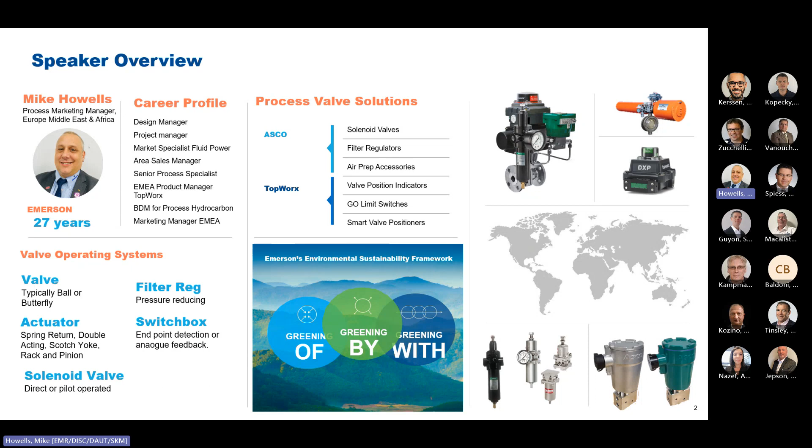So I'm Mike Howells, I'm the process marketing manager for Europe, Middle East and Africa. So predominantly I support the ASCO product range, but my previous positions were as TopWorx product specialist. So I have a good background on these topics and be able to give you an overview of what we can offer.

So just as a product overview, again, you may have seen this slide in the past, but the definition and context, it's a big word that's used very often these days, Industry 4.0. But what we're basically saying is that through the Industrial Revolution, we're at a stage now where we're looking at Industry 4.0 being a data or digitalization of processes and systems.

And how that works with ourselves is obviously the IIoT, which is the Industrial Internet of Things. And another phrase that we like to use within Emerson is floor to cloud. And what that basically means is that we're able to analyze some of our processes and some of our technology that we use in machine automation or process automation.

And from that, we're able to use diagnostics and statistical data, which can then be transferred into what's known as the cloud, which basically means it's in the internet space. And then we're able to access that information anywhere across the world, be able to act upon any of the diagnostic data that we receive or any of the information.

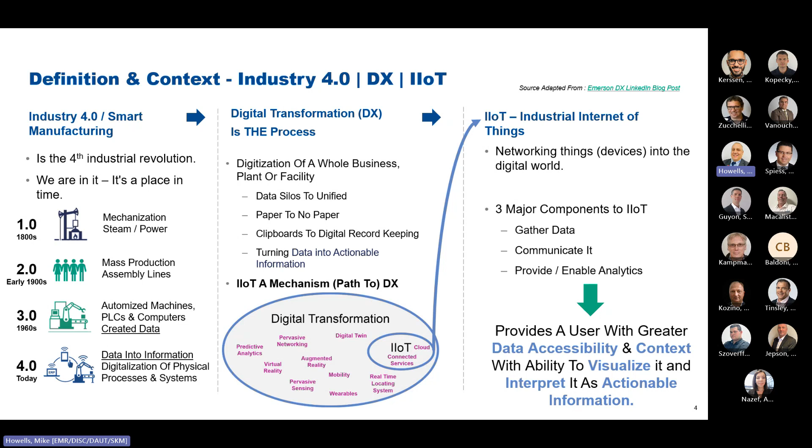So in a DX process, what we have is some DX ready process products. And within the process industry, what we have is a number of products which allow us to give digital feedback. So digital feedback is a sort of 0 to 1, or on-off system, of being able to give an electrical signal back.

And then from that information, we can interpret how long it takes to energize, or how long it takes to feed back, how many times it's fed back. And then we can use that information to diagnose how healthy our system is. So that's the simplest form of digital feedback, or DX, that we have.

And then what we have is some advanced diagnostics. So with some of our TopWorx product range, we have the ability to have a HART signal, which again gives us a lot more advanced diagnostics. And then we look at systems like the AF2, which is again able to analyze data in a greater format.

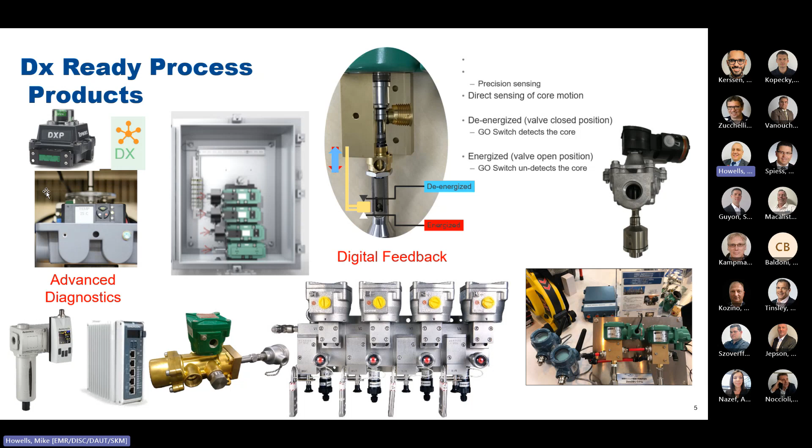And then we're using some of our RXi products to then interpret that data and be able to give us things like a graphical display, or using some of our software such as Movicon to be able to give that to a customer in a format that you can easily interpret.

So looking at some of the challenging solutions, again this big word, connected from device to control, from edge to cloud. So some of the areas where we've seen some benefits is that in energy consumption, around 20 to 30% is lost in compressed air.

Downtime - so when obviously you're not able to monitor a process, if you're not able to analyze the data, then we're looking at being able to reduce downtime in unplanned maintenance. And again, by using that statistical data, we can actually increase overall equipment effectiveness by around 5 to 10%.

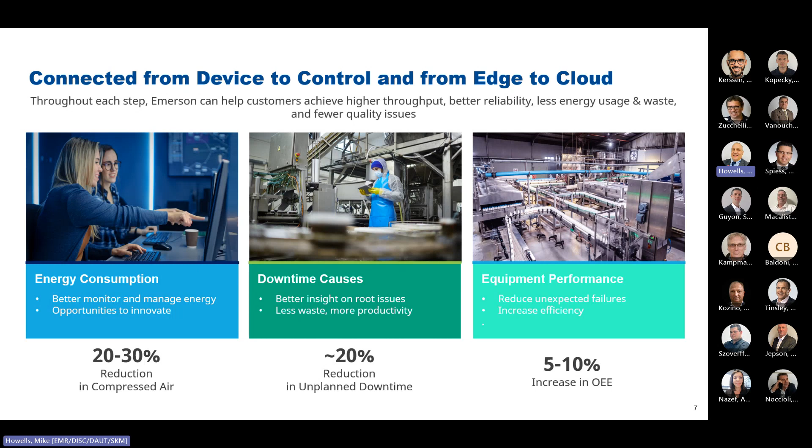So looking at some of the systems that we use, with preventing unplanned downtime, we can monitor the life cycle of key devices. So again, within the process industry, we have things like actuated devices, actuated valves, and with actuated valves, we do not know whether the parts need to fail, or we don't know if we need to replace them until they fail. So a lot of these systems are in place and we don't actually know how many times they're being operated, how many times they're being in service.

But by using this statistical data, we're able to manage the life cycle of products, and in something like an actuator, it's measured in mileage, or in valves, it's measured in cycles. And then what we're able to do is use that data to be able to predict when is the correct time to manage or have a shutdown to be able to replace these parts.

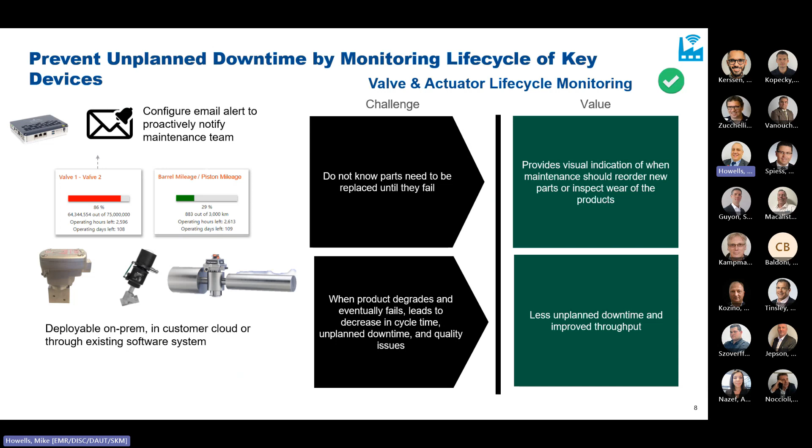So less unplanned downtime can improve the throughput and improve the efficiency of our system. So reduced energy consumption and spend.

Again, I was looking today at the cost within our own factory, and the carbon footprint, which again is a very important - net zero is a very important system that people are looking to work towards. But one of the issues that I do have is how to manage that, or how to represent that they're reducing the carbon footprint. So again, one of the costly energy consumption usages is within compressed air. So typically, a manufacturing plant can lose around 30% of compressed air due to leaks.

We're reducing wasted energy and compressed air costs, which can be very costly for our customers. Over time, air leakage can lead to increased energy costs and machine downtime. But if we're able to analyse the airflow and where these leaks are, and manage them efficiently, then we can reduce energy consumption and spend.

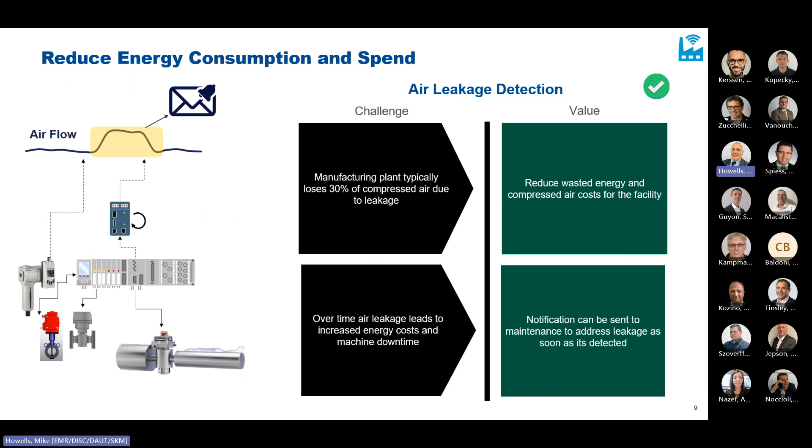Another important factor within the process industry is improvement of availability and safety of the process. One of the systems we have in place is an advanced redundant control system. What we're able to do is increase safety without impacting the availability of the plant. So we're using voting systems, and we'll talk a little more about voting systems later on. We're looking at a 1 out of 2 system, or a 2 out of 3 configuration, which improves our safety integrity levels.

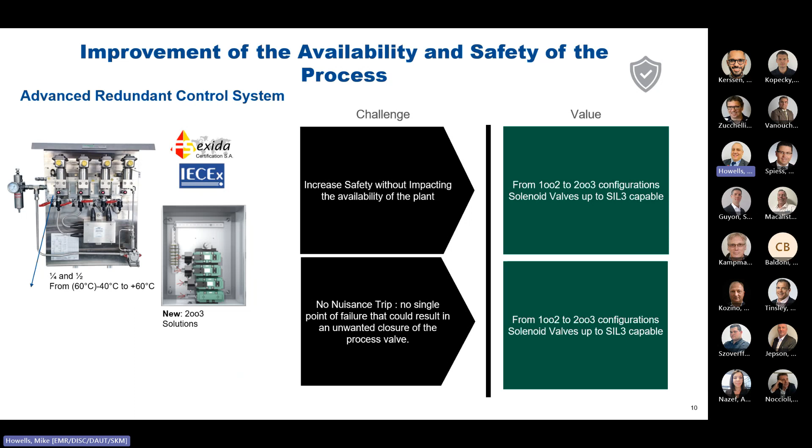No nuisance trips is especially a problem on a large plant. If you have a number of monitoring systems that receive bad information, it can shut down your plant, resulting in an unwanted closure of a process valve. We've seen some benefits in being able to offer a customer a solution within a redundant control system.

So what we're going to look at now is the products that we have available. First, we're going to look at the TopWorx solutions. Typically TopWorx is a discrete valve controller or a switch box, and we also have the Go switch, which are 2 unique products within our portfolio.

So one of the systems we use is a partial stroke test. What that does is enable you to open or close the valve within 5 to 10 degrees of fully closing. So you're not interrupting the service of the valve, whether always open or always closed, but you're able to maintain that the product is working efficiently and correctly.

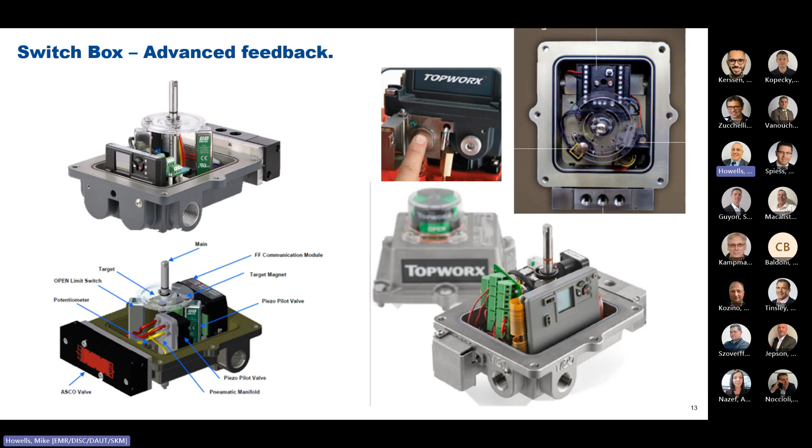So on the HART 7 device, this is typically some of the diagnostic features we're able to measure: analog position, meaning instead of an open or closed position, we can actually measure how a valve is moving, from 0 to typically 90 degrees, which is the path a valve device takes to open and close.

That gives you the ability to see how long that takes, and you can measure each of those positions to see whether it's juddering, or taking longer to open or close. We can test the fully open and fully closed signals, and we're also able to test the internal temperature — if there's an over temperature inside the device, is that an issue we need to be aware of and investigate?

We're also able to measure the timing in milliseconds. If a device is taking a lot longer to open or close, that gives us advanced diagnostic feedback we can react on and investigate. So if it's taking too long to open, we can do some maintenance on that device to make sure it's operating correctly.

Because TopWorx is an Emerson device, we talk directly to the Delta V system, so we don't need any additional hardware. If the client has a Delta V system in place, it automatically recognizes the TopWorx device as a generic device that Delta V can read. The displays the customer sees are exactly the same as with any other Emerson device, whether it's a Rosemount transmitter, temperature gauge, or pressure gauge. We're able to see the same diagnostic features and set it up, so if the customer already has Delta V in place, he'll be familiar with setting up the device and managing alarms and other systems.

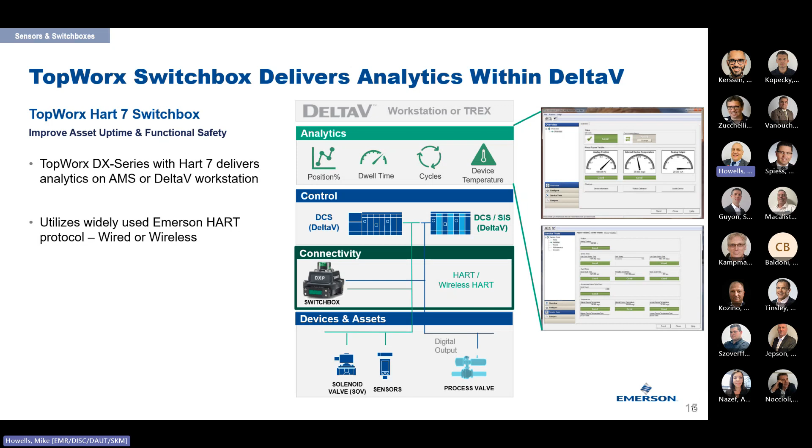HART is not something particular to Emerson. There are tens of millions of HART devices globally, so our device will talk to any HART-enabled system. It doesn't have to be a Delta V system, it can be a Honeywell system or another system. We're able to read that information and also read the diagnostic features.

Analytics can be created for every different environment, and you may need different parameters. For example, a food and beverage application may be open and closed all the while, so you may monitor that. You can configure the alarms to suit whatever application - an oil and gas application, a food and bev, or a water wastewater application may need different parameters to determine whether preventative maintenance is needed. With this device, you're able to monitor and configure different alarms to suit the actual application.

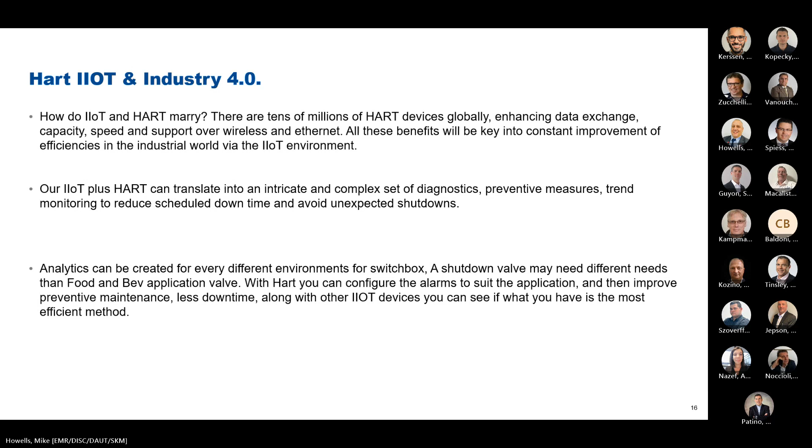What we're able to do is, if we have a HART-enabled device, that will still read the open and close signal. A customer may want to future-proof his plant - at the time he's not HART-enabled, but in 5 or 6 years he may have the infrastructure in place to read that. By installing a HART-enabled switch box into a standard switch box, you're future-proofing your plant.

What the customer is able to do then with an AMS Trex is use some of the diagnostic features available with the HART device, and make educated decisions on whether that device needs to be maintained or put out of service, reading some of the analytic features you get back from that HART device.

If we look at some of the largest refineries in the world and equate that to how many barrels per day they produce, the cost of installing these products is absolutely minimal - the return on investment is basically seconds. If they have to shut down the plant or replace products, being able to analyze the data and make educated decisions on when you need to shut the plant down means the returns on investment are very quick.

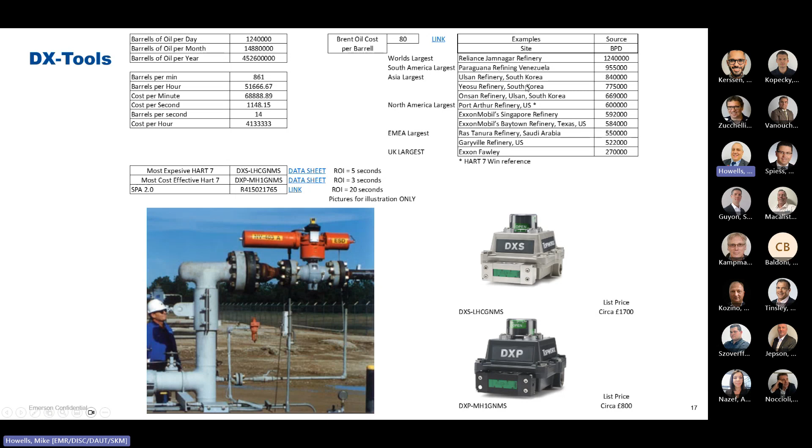As I mentioned, on the DX series we have Foundation Fieldbus, which has a number of features you can set. It's integrated within our AMS or Delta V systems, but Foundation Fieldbus is not unique to Emerson - you can connect that to any Foundation Fieldbus configurable system or DCS and be able to read the advanced diagnostics.

As I mentioned previously, we have the partial stroke test. The typical function of an emergency shutdown valve is they're normally static for long periods of time, either in an open or closed position.

Essentially, what a customer needs to be aware of, and it's in legislation in some areas of the world, is they need to ensure that if on demand that device is actuated, it will respond. If it's an ESD, an emergency shutdown valve, that's an integral part of a safety system. But at the same time, a customer doesn't want to shut down his complete process. So he needs to make sure the valve's functioning correctly and operating, but at the same time not shut down the complete plant.

So there we have the ability to offer a partial stroke test. That just opens or closes the valve to around 20 degrees, and makes sure the integrity of the valve is correct. We have some standards, periodic proof tests that are needed to ensure the safety function of the valve. That may be part of a site's legislation to ensure the insurance of that site is maintained. They'll need to periodically proof test all the products, and this is a way of doing it without shutting down the plant.

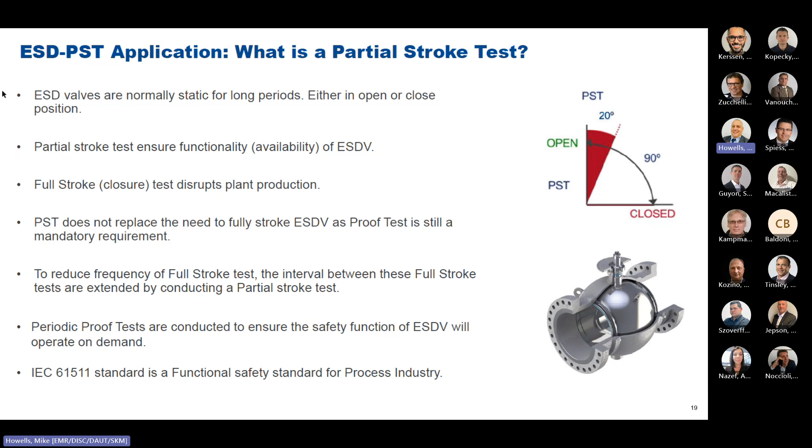So a recent device that we've added to the range is the DX PST. This is a partial stroke test, but we have more diagnostic features.

Typically, as well as the partial stroke test, we're able to do a valve signature. A valve signature means we can test the valve when we first install it, take that signature, and then monitor it over time. If there's any deviation in that signature, we're able to perform maintenance on the product and maintain it in a working order.

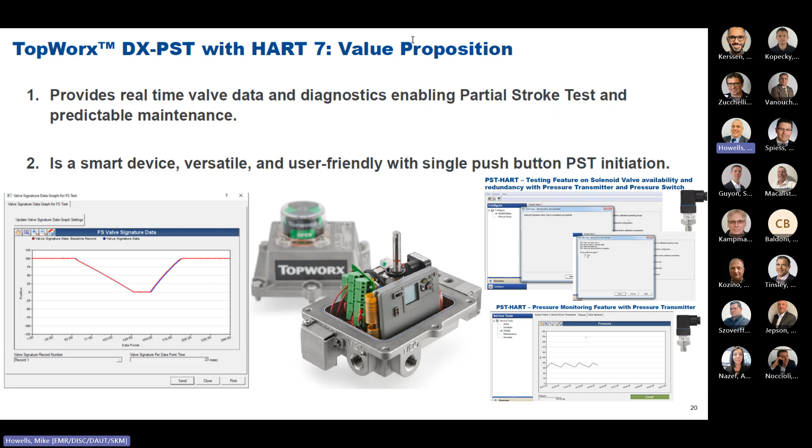As well as the partial stroke, we're able to add additional features onto the line. As I mentioned before, some typical features a customer may have is pressure monitoring, to make sure the pressure in his plant is performing efficiently. With our HART 7 device, it has additional channels, so you're able to feed that pressure transducer back into the HART signal and go back to the control room to analyze that data. This could be very useful for a customer who wants a complete closed loop to check that the whole system is working efficiently.

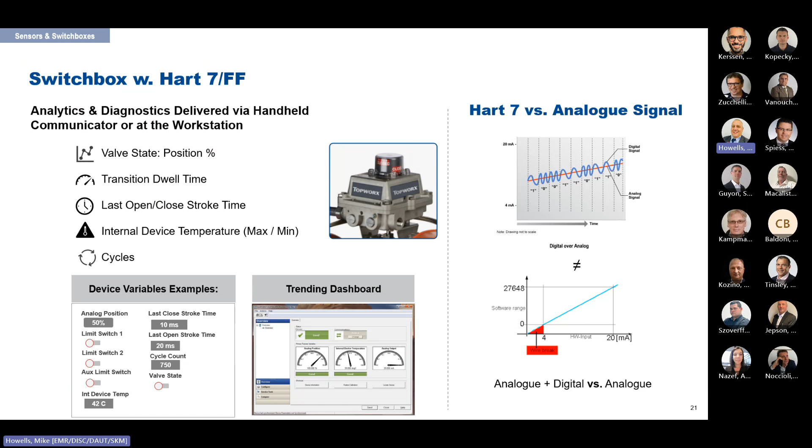We're able to do similar analytics with the handheld device, the AMS communicator. We're able to set the parameters in terms of alarms, etc., and take some diagnostics directly at the device.

So there's just an overview of the two different devices. We have the standard PST, which we've had for around 15 years without the advanced diagnostics, but it still has some diagnostic features to enable the customer to see that the partial stroke test has been performed correctly. And with that padlockable panel, we're able to test the partial stroke either remotely from the control room or on the device during maintenance, when the maintenance guys need to go around and make sure that's functioning correctly.

Another part of the portfolio, as mentioned, is the Go Switch. On a number of our products, we've incorporated the Go Switch because of its features and benefits. The design is very unique.

The Go Switch is able to withstand a lot of harsh environments. It typically works from -60 to 204 degrees Celsius, and is also able to work under extreme pressures. We generally have pneumatic pressures, but the Go Switch will work in hydraulic pressures and subsea pressures. It's able to withstand tens of thousands of PSI, not just the standard 140, 150 PSI that we may see in our systems.

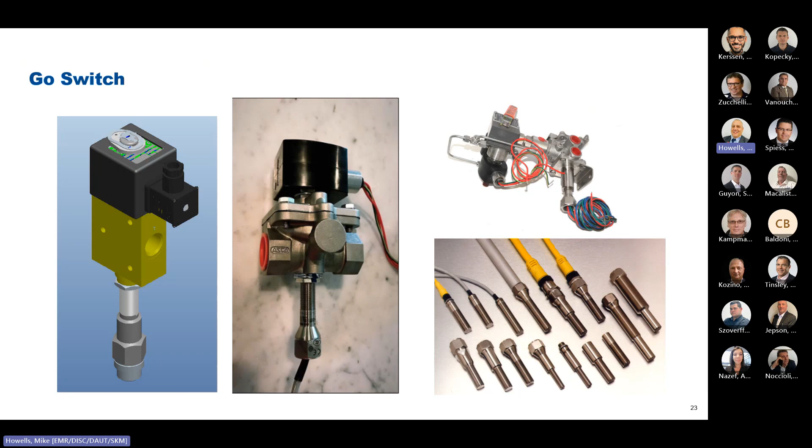So you can see we've got a number of devices there where we've actually had some feedback on an X344 valve and an 8215 valve. And again, we're able to use that as a feature of a safety feature.

Because the Go Switch doesn't maintain any power or doesn't need any power to operate, typically a lot of the sensors we use within our portfolio, something like a hall switch sensor or a proximity sensor, need a 24-volt DC supply enabled to give you any feedback whatsoever. So what that means is, in the event of a particular system having a failure, it doesn't need any voltage to give you a signal back.

And what that's able to do is we're able to connect that to wireless systems. So Rosemount offer a 702 transmitter, and what we're able to do is use that 702 transmitter to receive our digital signal from the Go Switch. Because it doesn't maintain any power or need any power to operate, that means a typical system could be in place for up to 5 years and still have feedback and still be able to monitor.

So for things like safety systems, it's very important. One of the applications we have is a safety shower. Again, we're able to maintain that signal in the event of somebody operating the safety shower and needing some assistance, we're able to send that signal across.

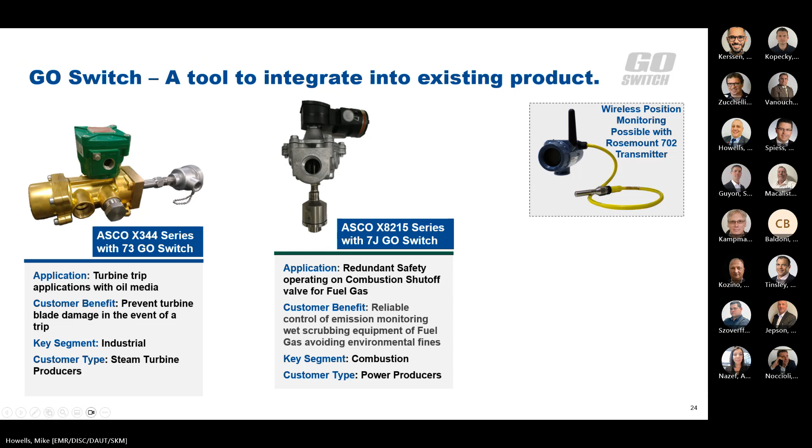So again, we also use the Go Switch on our redundant control systems, and that's an internal feature of how the device works. Internally, we have the connections. Typically, an 8327 device only has to move around 1 millimeter, and we're able to sense that 1 millimeter movement and give some feedback.

So again, in a lot of systems, what we're able to do is connect that up and make sure the device has actually moved and give some additional feedback to systems, which typically on a Go Switch or a normal system you'll be able to analyze.

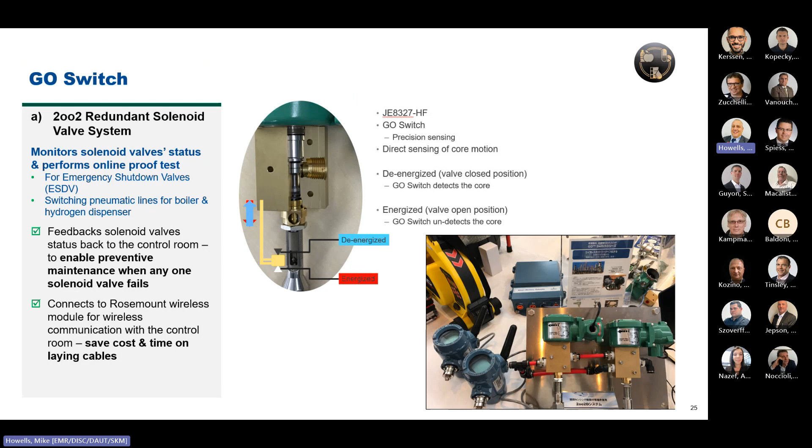But in some of the other systems, we're actually able to conform to standards. On the combustion standards, they actually need a physical feedback or proof of closure switch, proof of closure mechanism. By incorporating the Go Switch, we're able to achieve those standards and offer a solution to our customers.

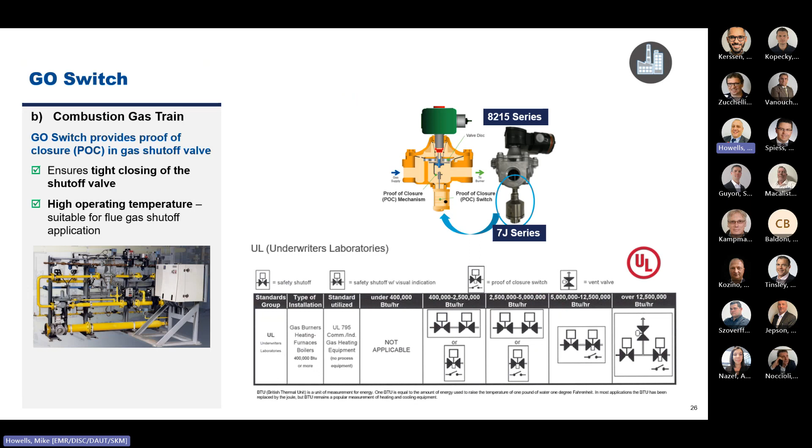Another device we have within our portfolio is the Smart Digital Positioner. So positioners within the Emerson range, we have the advanced positioners like the 6200, the DVC 6200, and now also the DVC 7000, which is the latest device.

Where we sit is perhaps at the different tiers of that advanced diagnostics. We don't offer as many diagnostics as a DVC 7000 or 6200, but typically in a lot of our applications customers only want a certain amount of diagnostic feedback. Again, we're able to offer positioners that give that solution to the customer at a more competitive price in comparison to larger diagnostics.

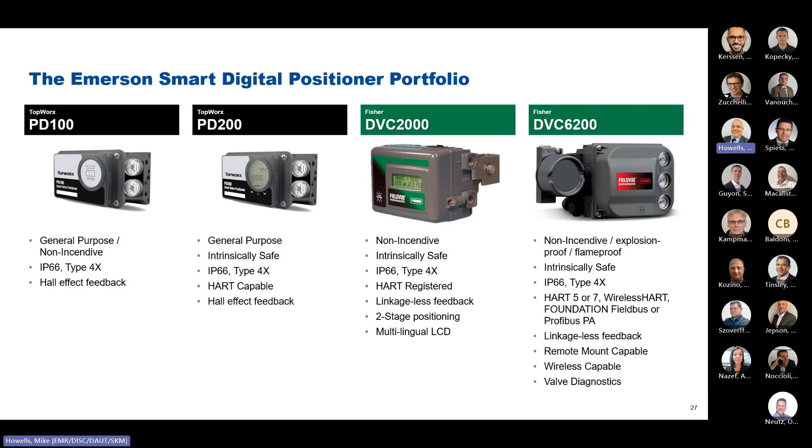But what we see more in the industry is that even on quarter-turn valves, the on-off valves typically within the process industry, customers again want advanced diagnostics and more feedback. We've seen more and more that instead of having an on-off feedback device like a switch box, customers are moving more towards a valve positioner to give them more diagnostic features and more communication back from the device.

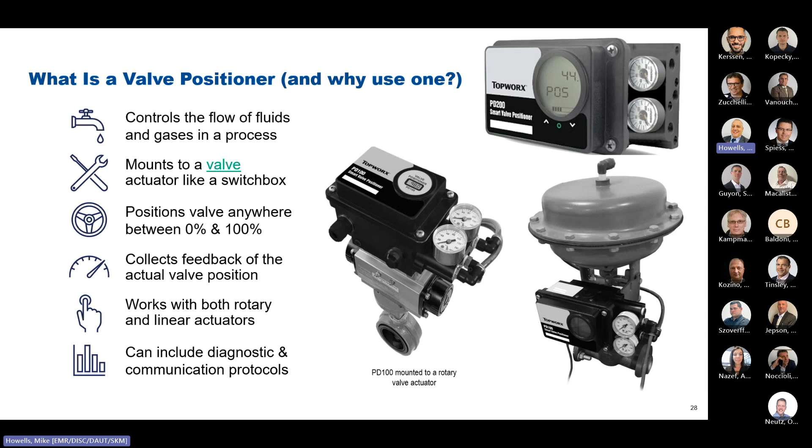So looking at the PD series, some of the features and benefits of that product: the PD 100 being the 4 to 20 milliamp feedback only, but the PD 200 having the HART communications protocol and a little bit more configurable features.

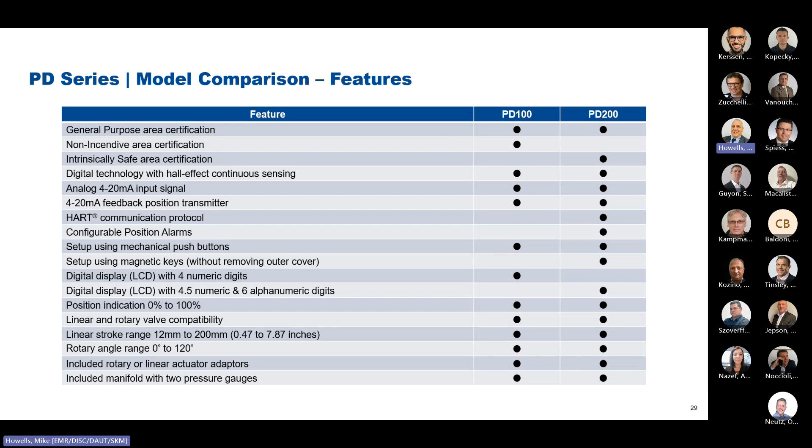So looking at the ASCO solutions now, and as we all know, ASCO are certified safety and reliability. When people think of a device that's very high quality, that's at the top of the portfolio, then ASCO is always used, and a lot of times we're part of the reference list. So what we'll see, especially in the process industry, is ASCO or equivalent.

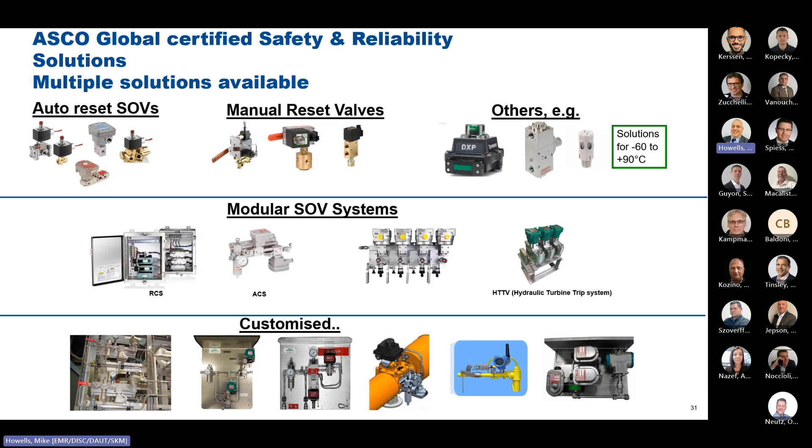So we have a number of solutions from your standard solenoid valves, moving across to modular systems, and then over to the more advanced customization systems. And as we all know, that's where we have added value. One of the systems we'll be looking at today in the modular system is the RCS, which again is typically used on emergency shutdowns.

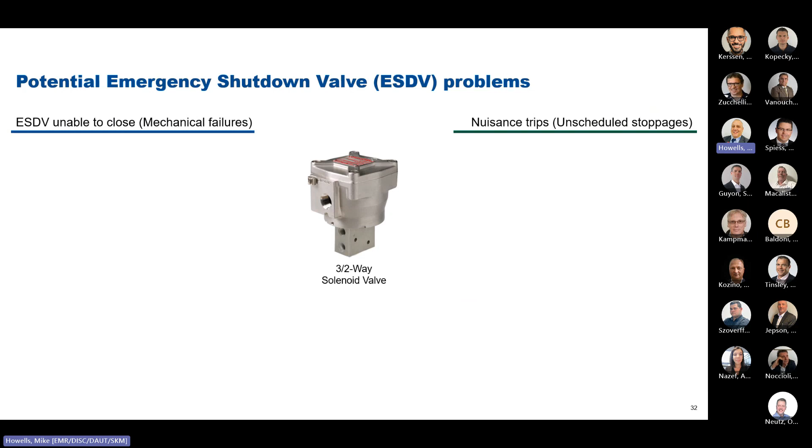So an emergency shutdown valve, or ESD valve, can potentially have some issues. A single process valve can be jammed or have a broken valve stem. Looking at an actuator, that can also have issues like jamming or broken springs. And with our device, a solenoid valve, we have similar issues to deal with. So that's seen as a safety and reliability issue.

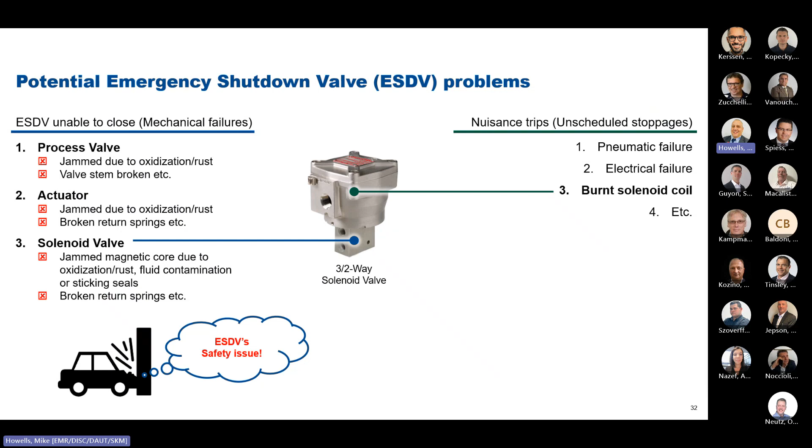With the solenoid valve, some of the issues you have are nuisance trips, meaning unscheduled stoppages. That could be from a pneumatic failure or electrical failure. A typical one for a solenoid valve is a burnt out coil. What we're trying to do is reduce these situations, because each one can produce a lot of downtime. As mentioned a few slides back, when looking at a large refinery like Jamnagar, the potential losses run into millions if that's down for any period of time.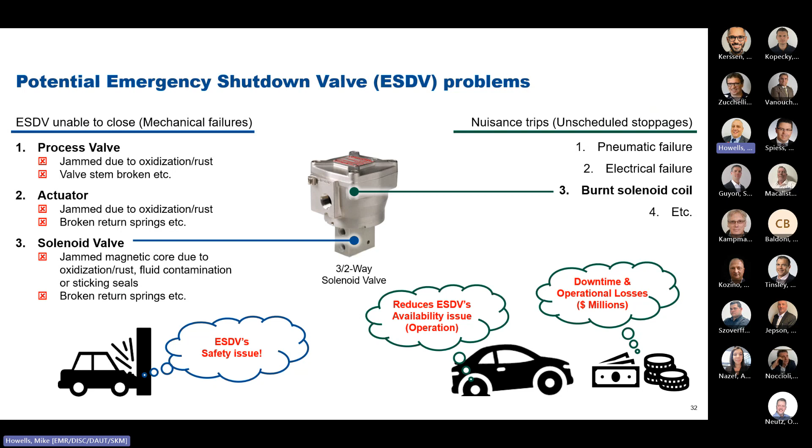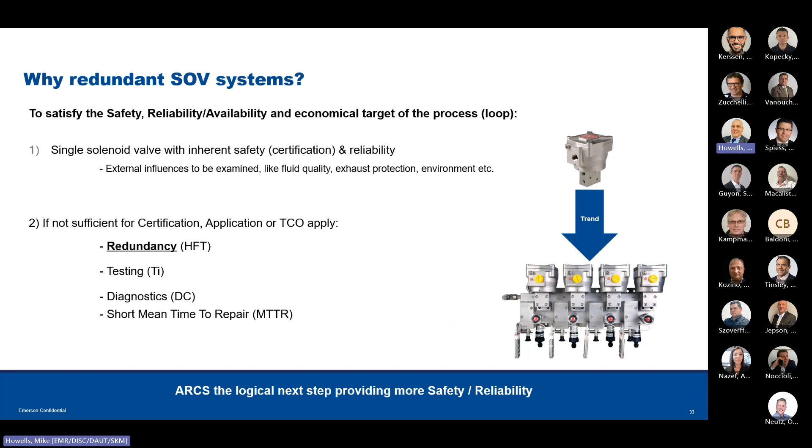So what's a redundant system? A redundant system is not a single valve. With a single valve we have inherent safety, but what we're looking for is redundancy, so that if something happens with that one valve, we have additional valves to create more safety or more reliability for the end device.

Typically we have a 1 out of 2 system, which looks at increased reliability or safety. In a really safety critical application, if one of those two solenoids fails, the system will shut off. So if one valve stays open and you want that valve to shut, a 1 out of 2 system gives you that shutdown immediately.

A 2 out of 2 system increases availability. When we talk about nuisance trips, they want to be able to say that if one of the valves fails or receives a nuisance trip, they don't want the whole system to shut down. So in a 2 out of 2 system, both valves have to fail for the whole system to shut down.

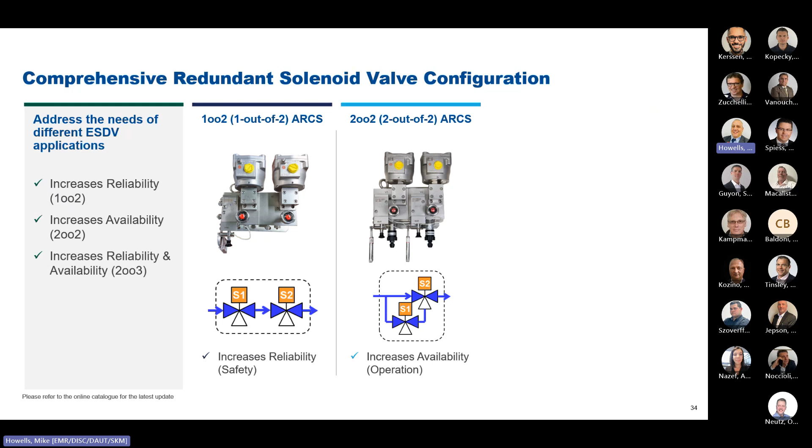And then a 2 out of 3 system is the best of both worlds. We have a more secure voting system, which increases reliability and increases the availability of the product.

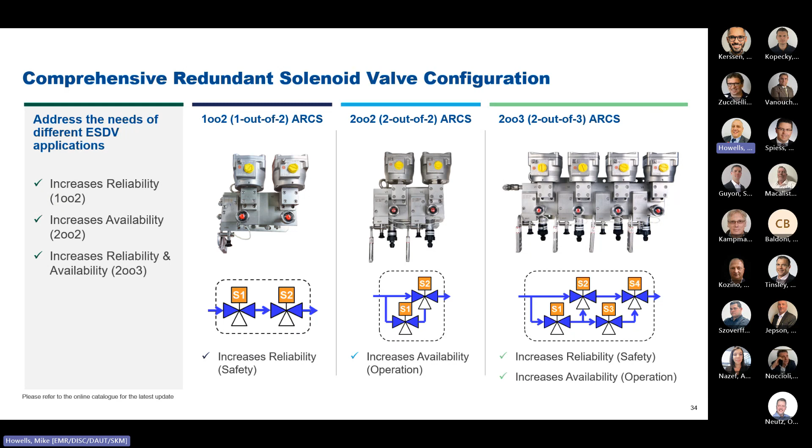So how we used to do this in the past was a mixture of lots of valves. Here we have a 2 out of 3 system using individual valves and equipment. As you can see, there's a large number of pipework. It's very complicated, and each of those pipes can be a potential failure point. You can get leakage on all of these points, and it's quite expensive to produce that product.

So with the 2 out of 3 direct valve-to-valve design, we have our own incorporated manifold blocks, and internally a lot of the functions you can see on the left-hand side, in terms of shuttle valves etc., are incorporated inside the manifold.

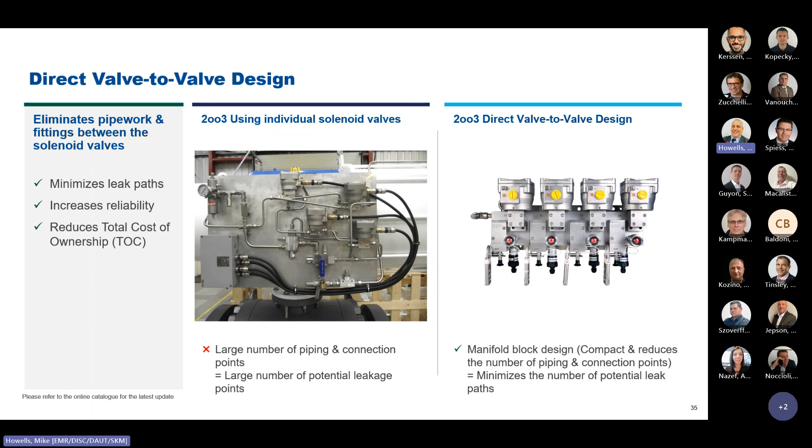We're also able to get advanced diagnostics, so we can look at the pressures going through the valves, and we can look at pressure switches on the bottom. We're also able to shut off each individual valve. So if one of the valves actually fails, with a burnt out coil or not functioning correctly, we can individually isolate each of those valves, remove the solenoid, replace it with a new one, and put the system back into service without interrupting any of the systems.

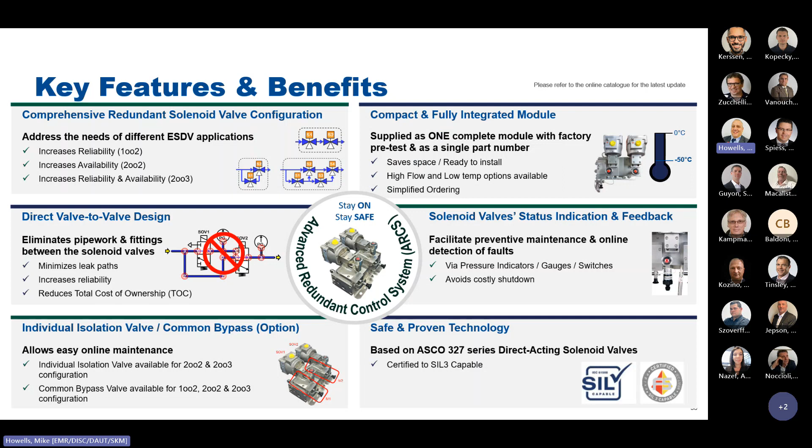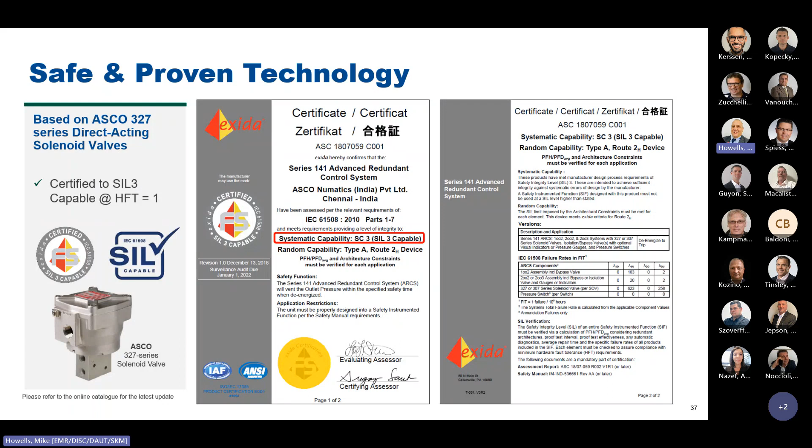The valve itself is built on a solid design, the 327 design, which is a very high, safe and proven technology. The 327 has been in service for close to 30 years now, and we have a very high safety integrity level on the device. We're constantly updating that and moving with whatever the industry looks towards us to do. We can have 1 out of 2, 2 out of 2, or 2 out of 3 configurations.

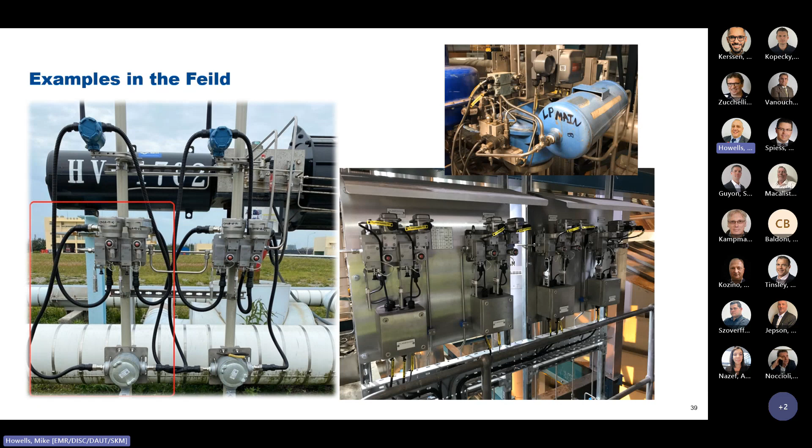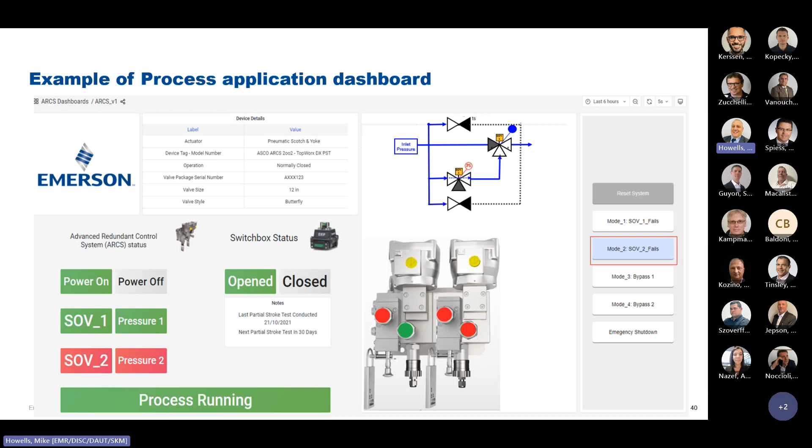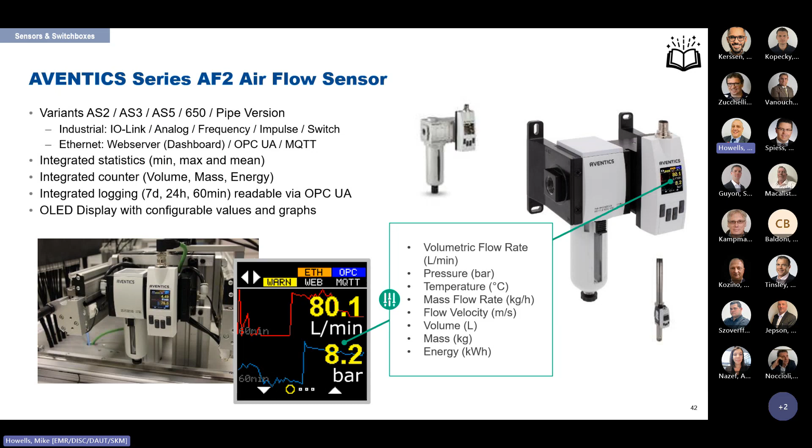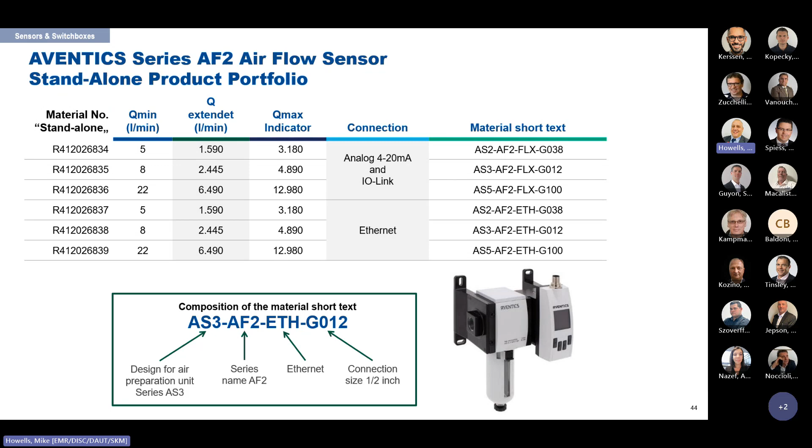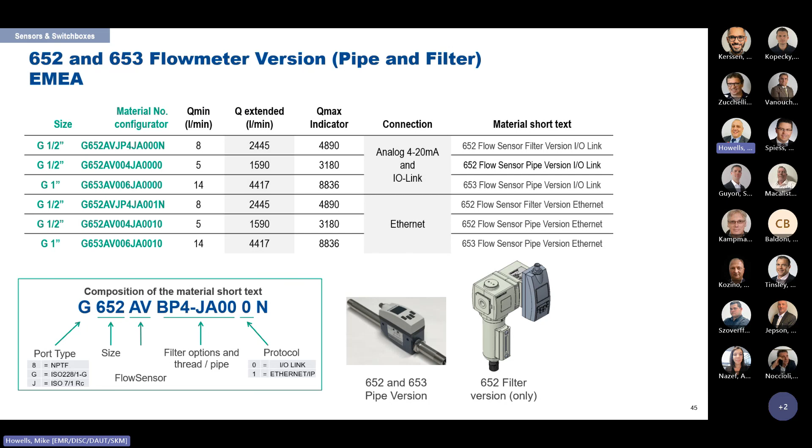Moving on now to the AVENTICS products. We've probably seen this a few times with the AF2, the airflow sensor, and we all know the features and benefits of what that can give you. But transferring that into solutions, it's very important to the customer to be able to monitor how much air is being used. In the process industry, we've seen that typically when a customer puts a product together, they may test a complete valve system, but they'll never know how much air is being consumed by his device. To enable us to show him how much air is being consumed, we could connect it to an AF2, and he'd be able to constantly monitor that device, get feedback, and act upon that feedback.

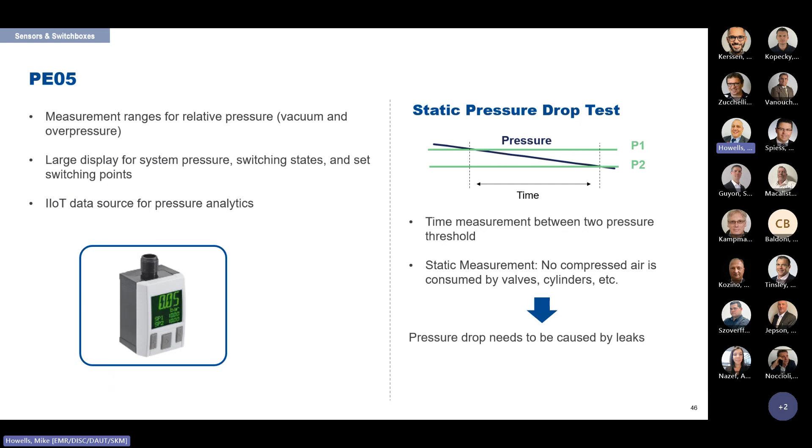What we also have is the PE05, which again is just a sensor. By analysing a sensor over time, we can do some IIoT data and statistical feedback, and analyse that to give a customer solutions on whether his product is working correctly. So what I have here are some examples of where I've connected this to devices within the process industry, and we're able to analyse with a device such as an actuated package what that means, and how we can use an AF2 to give advanced feedback.

We've sold this to our distribution network, and the distributors have seen the benefit in the SPA 2.0 case. At site, he can analyse when he's tested the product in-house, how it's performing correctly. He can note down how much air is being consumed, how long it takes to open, how long it takes to close. Then on site he can use that data to analyse whether there's any deviation in the product from when he first set it up to when it's been in service, giving him insight into whether the valve is potentially failing or close to failing, so he can perform some maintenance. We've seen some real benefits within the process industry of where this can be used.

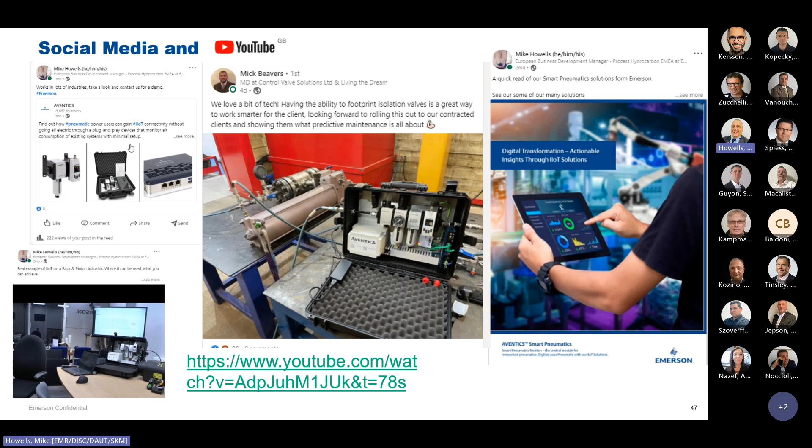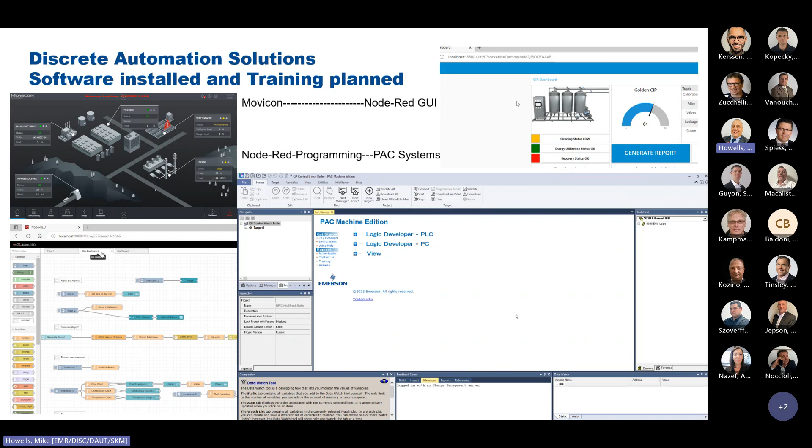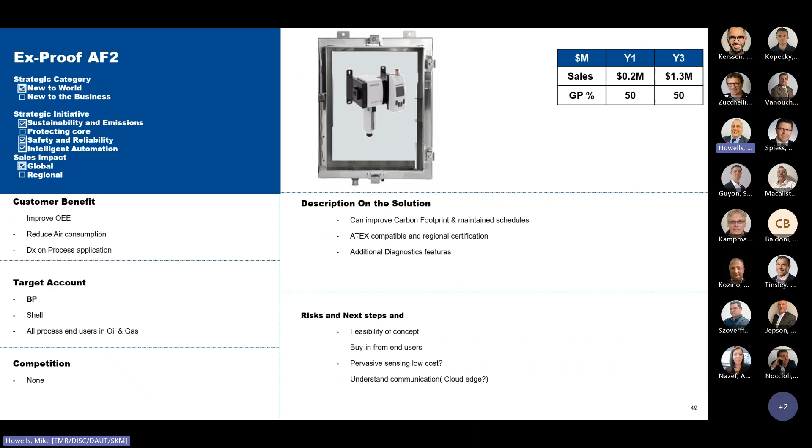So moving forward, it's typically just looking at what we have in our portfolio today and understanding what the customers need to help them achieve a return on their investment and positive results.

Target industries within the process industry are oil and gas, chemical, energy, petrochemical, water, wastewater. And some of the people we want to target are production and maintenance managers, safety managers, energy managers. And for each of these different people, they have a different need.

Obviously a production manager is looking at making it more efficient. He wants to know what can make his system give him more money in effect, what can improve the efficiency of his system. So by having this analytical data, he's able to maximize his plant uptime, reduce his unplanned maintenance or unplanned downtime, and make his system more efficient.

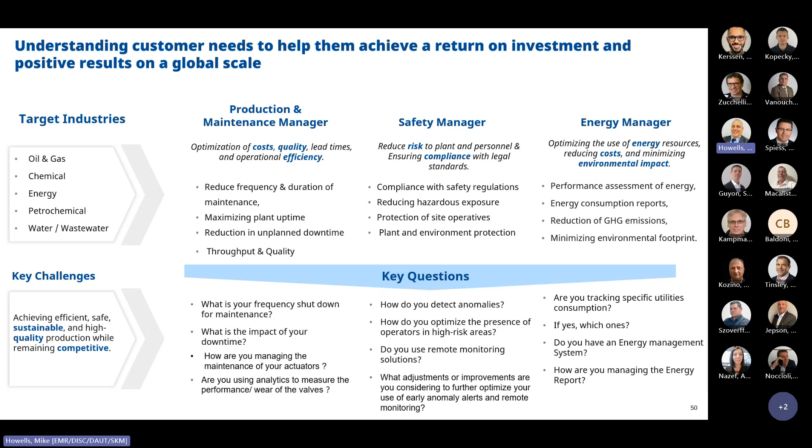Looking at the process industry team, we've got process specialists. Technically, these are guys that may not have the role of process specialists, but they have the knowledge of the industry where these solutions may be a benefit. So in different areas, we've got the process experts or the process knowledge base of people in different areas. Whatever area you're located, reach out to your process knowledge.

So that was a very quick overview of what we have to offer in the process industry, and I'll just pass it over to Anya to give you some additional support available to you.

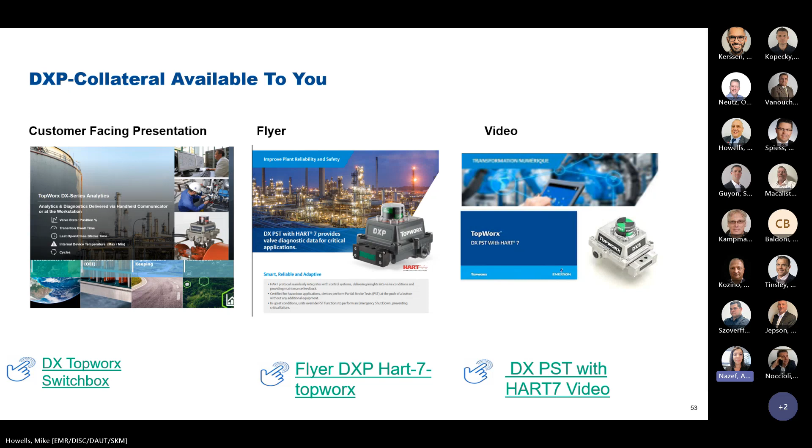Yeah, thank you, Mike. Hi everyone. Just to finalize the presentation, we've put in some slides with direct links to tools and associated documents such as presentations, flyers or videos, and sometimes you'll find also some more detailed training according to the different products that we covered during this training.

So again, it was just all we wanted to do really was give you an overview of what we have within our product portfolio that relates to the process industry. Obviously it's always very quick to go over this presentation, but we're always here on hand to support any of you. If any of you have questions or want me to go over any points we've gone through, I'm happy to do that now, or reach out to me after the call. But really, we can see some benefits in the products we have available. It's just highlighting what's there and what relates to the process industry and how that can help you in your DX journey.

The second question, from Willie, is if we have the MTTF for GoSwitch or SIL. So the mean time before failure and MTTF data - we have SIL certification for GoSwitch, so we're able to give that data across. We use Exida for our SIL calculations. A couple of the different SIL providers manage the results in different ways - Exida uses mean time before failure, TUV uses a different method, but again we're able to do this.